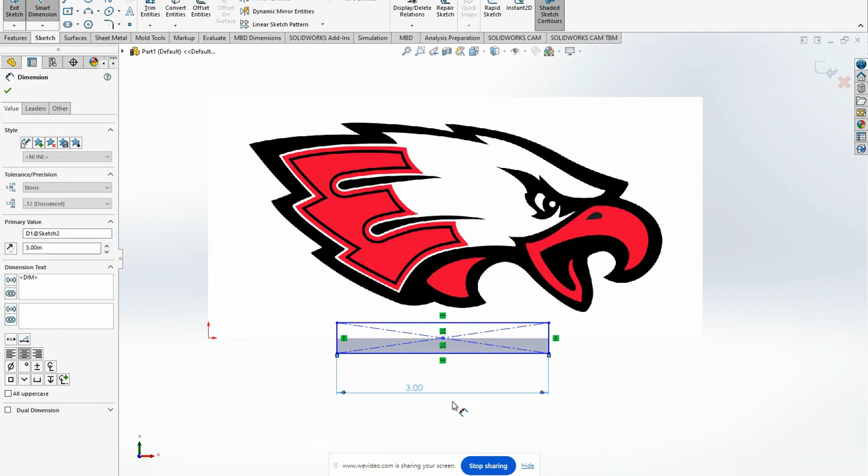I'm going to dimension it. It needs to be 3 inches wide, exactly, and it needs to be 1/2 inch tall.

Now, one of the things you can do is use your smart dimension to locate it by its center. So if I want it centered in this picture, I can go from the origin to the center point sideways and put it at 3.5, because that's half of 7.

Now the other thing I can do is move this around. So I'm going to move it down and exaggerate it a little bit, then give it a vertical measurement. I'm just going to use 0.25. I think that looks like nice spacing between the image and that - it gives it a little bit of lift off the very base and looks good.

I'm going to go ahead and click the top line and change it to be for construction. I don't want to delete it - I just want it to be there so it keeps all of the relationships there. I just don't want it to cut or be part of it.

Now, what a lot of people like to do is add a nice soft little outline on their image, and the way we do that is with a spline. I'm going to select the spline tool, start on the very edge, and kind of come up and curve into it to pick up this lip shape.

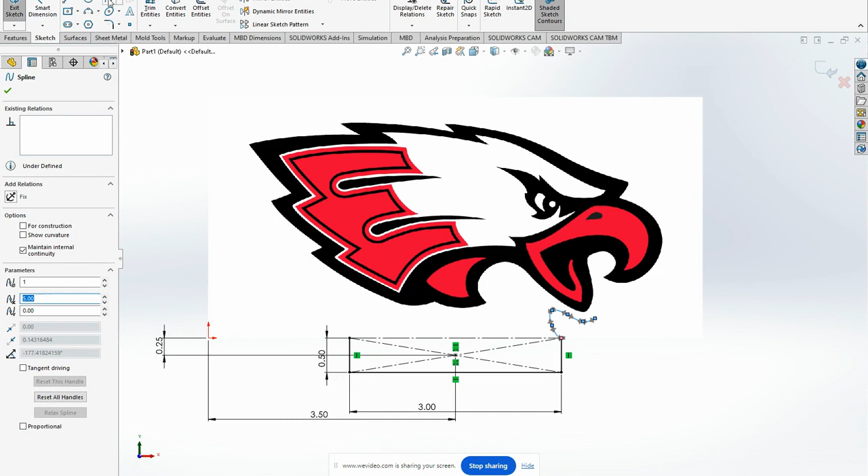If you double click twice, which is what I accidentally did, it'll stop your spline, which is good to know for later. But if we just want it to keep going, we just keep clicking. If it does happen to stop before you're done, just pick the spline up again, go to your endpoint, and keep going. I don't know why it wanted to stop after that, but that's okay.

This one actually was a good place for it to stop because what I want is a little bit more of a point there to follow along with what I'm doing.

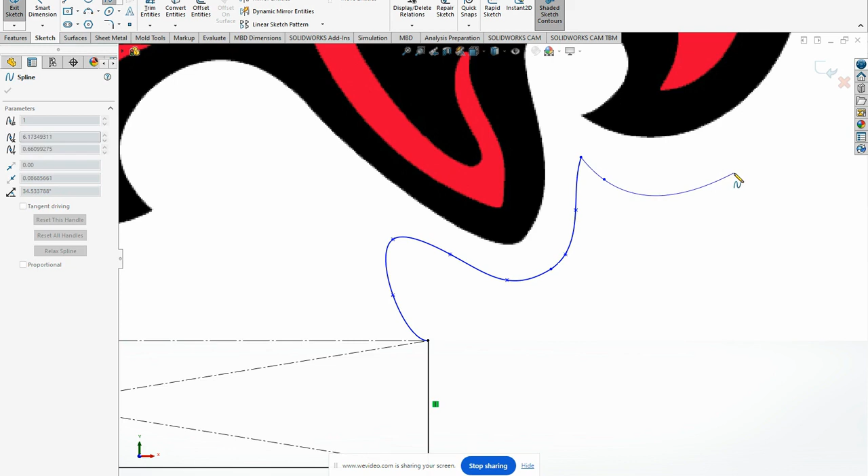I'm going to zoom out here. As you can see, I can bend it just by what the next point I click is. This one I didn't make too much of a corner there, so you can see the difference.

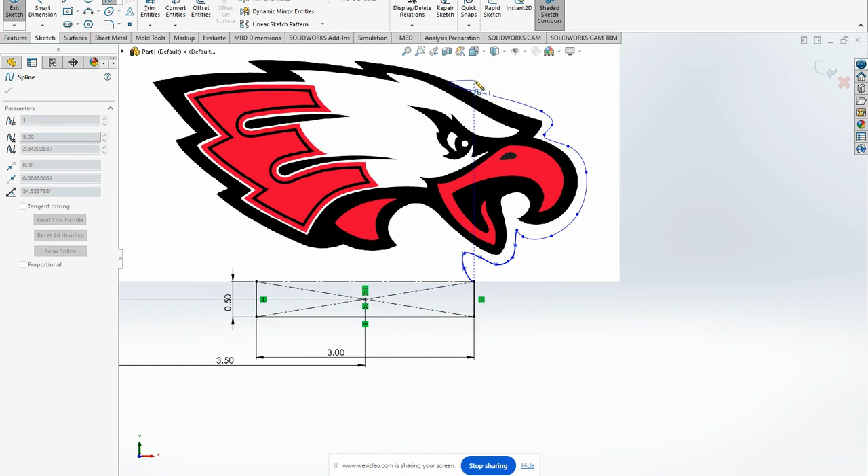But there are going to be some times where you really do want to make a corner. I don't know why mine's being temperamental and keeps wanting to stop, but I'm going to stop for a second here to show you that you can adjust these points, and also adjust the curve - like that one curved where I didn't really want it to. So I'm going to adjust the curve and the point location before I continue so I don't end up with kind of a weird little hook there.

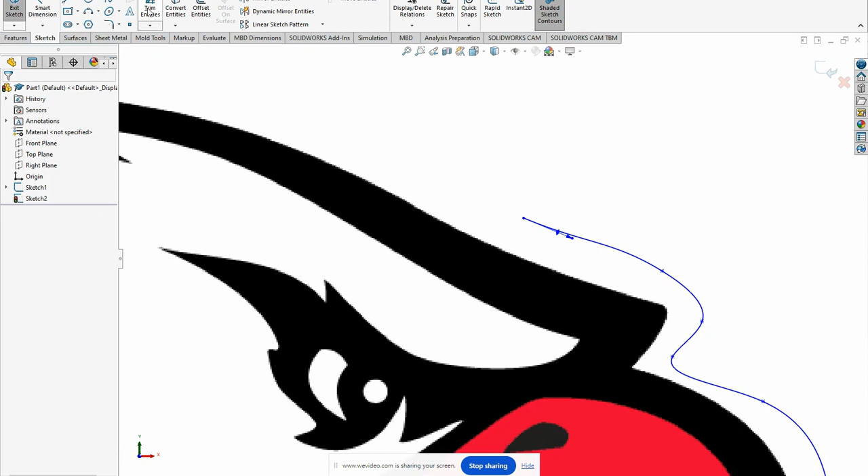And then I'm going to keep going.

And again, if I want to, I can double click and then start again to create something more like a point. Don't know why it stopped there, but it did.

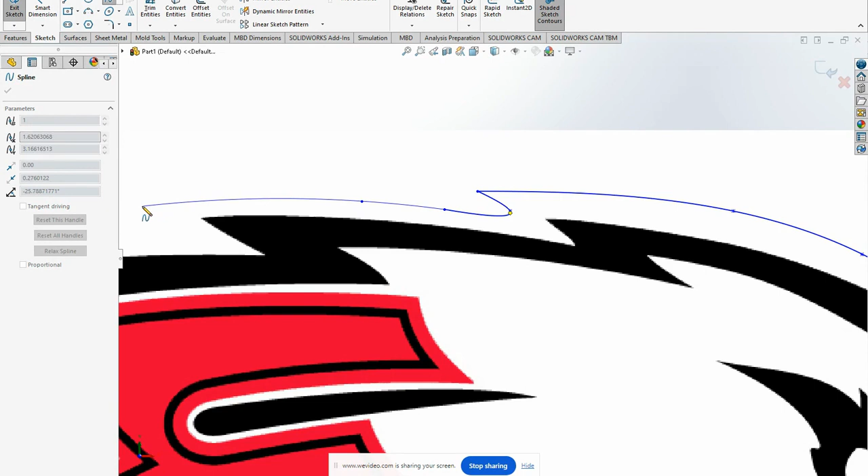And we'll keep tracing until we get to the back side. I'm going to again do this a little bit more round, unless it forces me to stop, which that one just did. Just to finish.

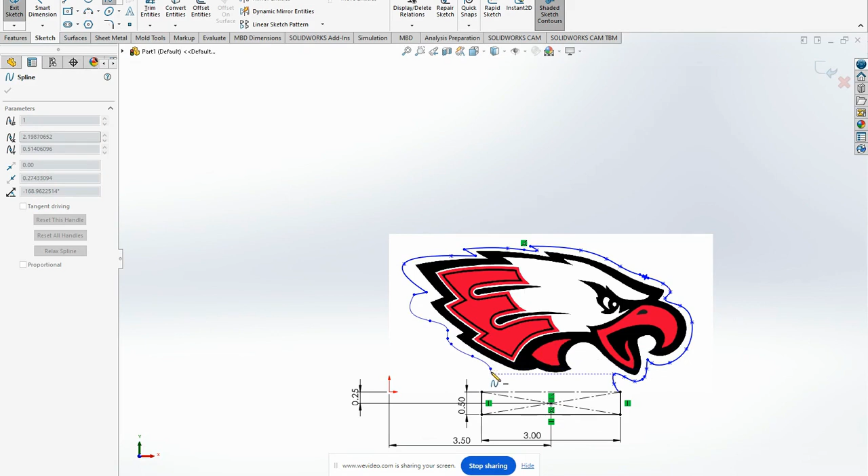There we go. And once I've completely enclosed it, that's fine. Now, obviously, if this was my project, I would come back and I would make some adjustments to like this line here, and various points along the way.

But you can adjust your spline so you get the outline that you're looking for. Now, in theory, this should all be an enclosed shape. I should be able to exit my sketch, hit extrude. It is not wanting to. It's trying to force the thin feature, which means I've got a gap somewhere.

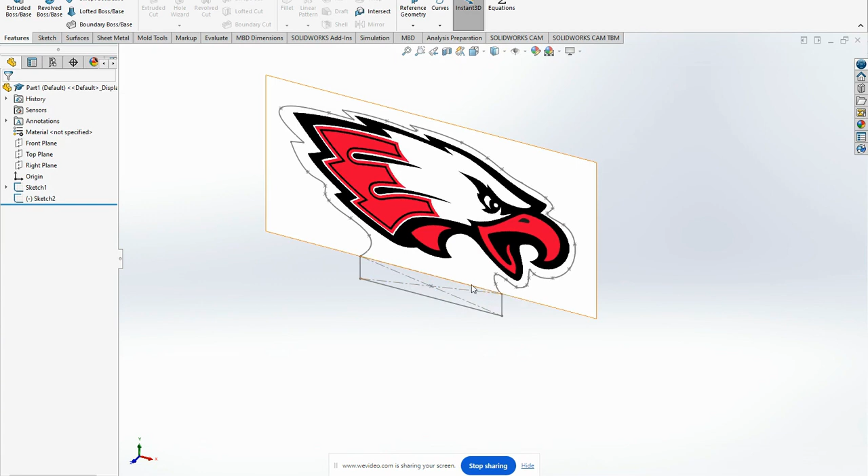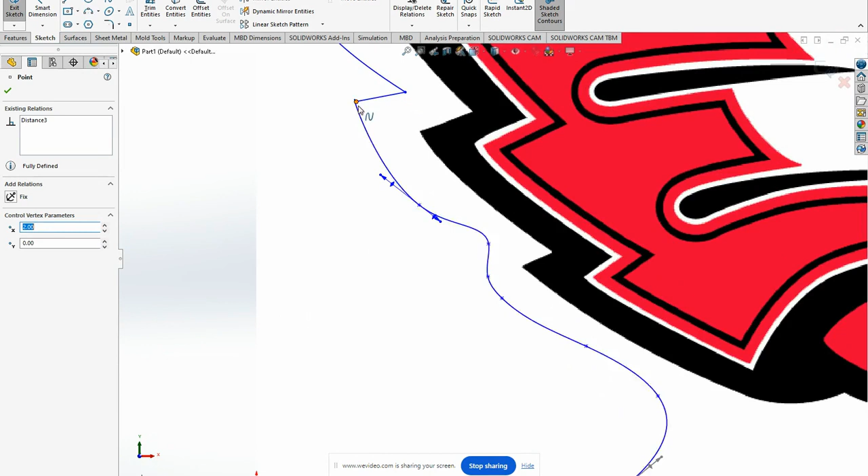All right, well, let's exit my sketch or edit my sketch, see if we can figure out what the problem is. Looks like it's well attached. This one's got a weird little hook. We're going to turn that down. Make sure there's no places where my spline accidentally goes over itself.

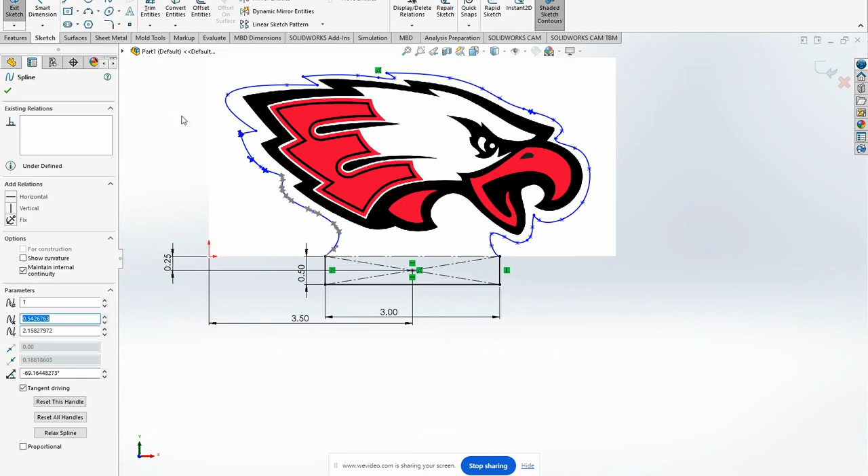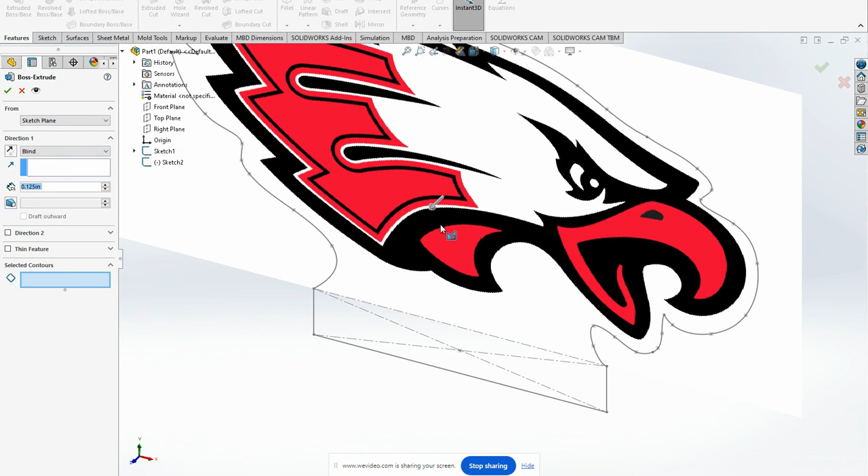That looks good. I don't know why stuff's going weird, but that's okay. It's good to have that sort of stuff in the video. We're going to try extruding this again. Let's go 0.125. There we go. Don't know why it was wanting me to select the contour, but that's fine.

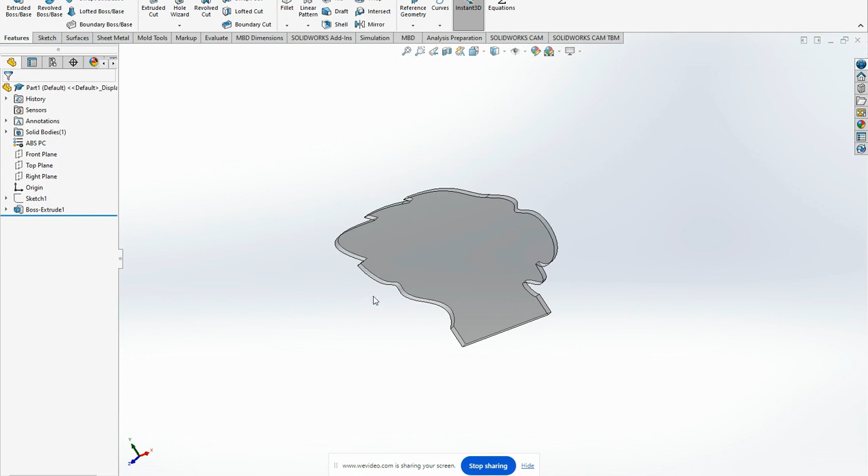Okay, I've then got this gray part. If I go to material and change it to ABS-PC, I get kind of a transparent looking part. I can also hide the sketch to kind of see what just the plastic part would look like. So this is all well and good.

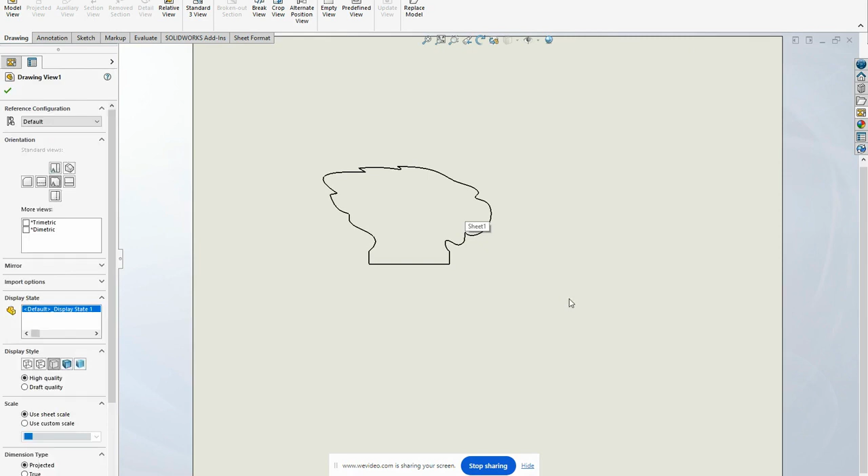And I just want to go to a custom sheet size, leave it whatever it is, and bring in the front view of my part. Now, I really only need the front view, so what I want to do is make sure it is set at 1:1, and I've got the front view of my part.

Okay. When I do this, I'm going to go to file, save as. I'm going to change the file type to a DXF right there and hit save. Okay. At this point, I am done with SolidWorks.

I'll open CorelDRAW. Once CorelDRAW opens, I'll say new from template. I'll pick my laser engraver template. I'm going to go to file import.

I'm going to go find that DXF, import it at 1:1, making sure my sizes look about right, and I will bring them in, put them in the corner. Change my pen so that it is the RGB red, and hairline. That way that's a cut.

Now, as you can see, it does not come in with the sketch picture. This is why we saved the picture in a separate folder, so that I can grab that picture and bring it in again.

Now, you're likely to have to do some lining up and resizing. The nice part is since they both allow you to set the width, you should be able to set that width measurement again. And then if you use your arrow keys, you should be able to kind of bump it back into place.